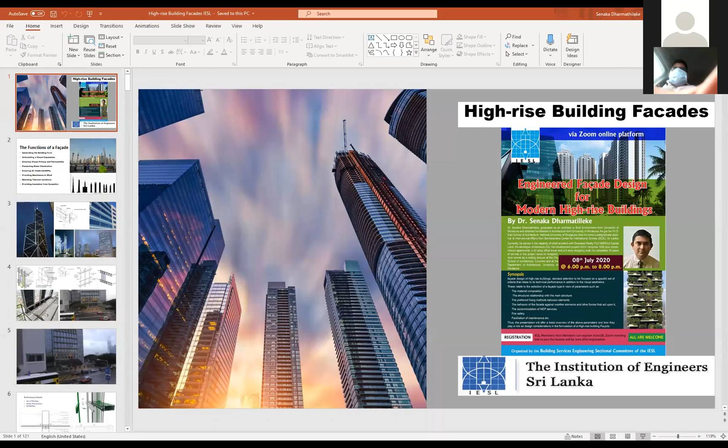Okay. So, talking about high-rise buildings and building facades, especially about building facades, I must say this is a very specialized field, and we do have facade engineers, glazing engineers who are related to this field. First, let me start with a confession. I am none of them. I am not a facade engineer nor a glazing engineer, and I wouldn't call myself an expert or a

specialist in this field. But what I am going to do today is share my experiences and also voice my opinions as well as views, and also share some of my fears and anxieties related to the development of this science of facade engineering, and maybe in my own humble way make a contribution to initiate this field of facade engineering, which should come from the engineering fraternity, right? So please bear with me.

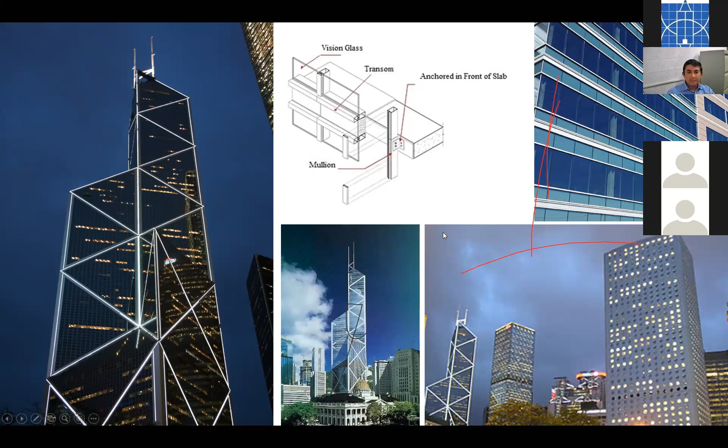And what I'm trying to explain by this slide is that when a professional, an architect or an engineer, is commissioned with the task of deciding on a facade, so many models or methods or strategies are looked at, explored, evaluated, discarded, then readapted and adjusted to suit situations, debated intensely in terms of the technical possibilities and also the architectural expression and so on. But at the end of the day, once the facade is done and dusted, it's all covered up and nobody talks about it anymore, right? So everything that went on to that

you see, does it come on this one? No.

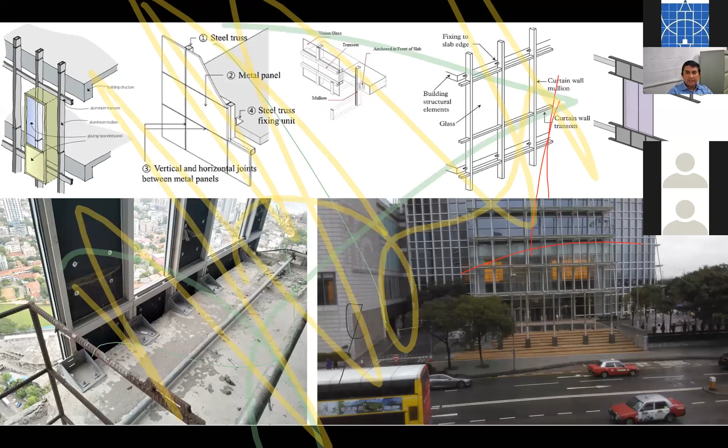Okay. So now this is the final product, the ground level of the IFC building in Hong Kong. And what are the performance characteristics that you want to ensure by a facade? Of course, the three main performance characteristics would be the infiltration of air, the penetration of water, and the deflection of the structural members of the facade, such as the mullions as well as the transoms, which are the main elements that check and balance the deflections that affect the facade.

Now you can see the transom, which is the horizontal member, and the mullion, which is the vertical member. Then you'll have the pressure plate, which ensures that the glazing infill is secured onto the transom and the mullion, and of course it is supported by an EPDM setting block, and the pressure plate and the glazing infill is at the interface with the weather.

It's taken up by an EPDM gasket, and all of it is at the end of the day covered by the pressure plate covers, right? And moving on to a more recent experience of checking these parameters such as air infiltration, water penetration, and deflection.

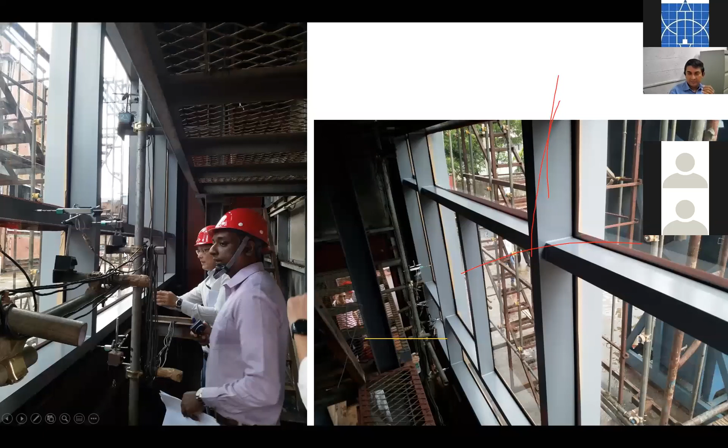Now here within the structure we have our engineer Mr. Jivananda, a member of the institute as well. I always feel very safe with him, because he is very thorough with his checking and ensuring that these deflections as well as penetrations remain within parameters, right?

And first, this is the preliminary inspection to see whether the gauges are in the correct locations and in the correct positions, and to see whether the joint fillings are perfectly done. And once this testing is done, he would move on to the control room.

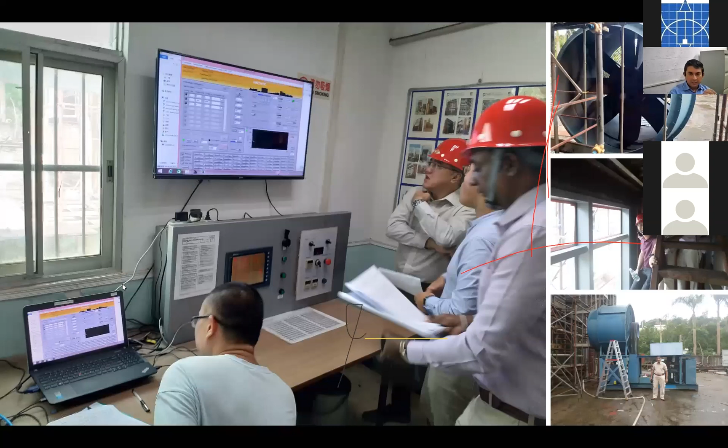Then, instead of using positive pressure of 4 kPa from outside, negative pressure of -4 kPa would be used, so the room would be made into a vacuum, and by making the chamber minus 4000 pascals, you will gauge the deflections of the mullions and the transoms, and also the amount of air infiltration.

So this is the control room, and the warning signals will come out if these parameters go beyond permissible values. And these are the apparatus at site. Still the turboprop is not engaged. This is an image just to show the scale of the chamber. The three of us can very comfortably fit across the chamber on the side of the width, and that's the size of the wind turbine.

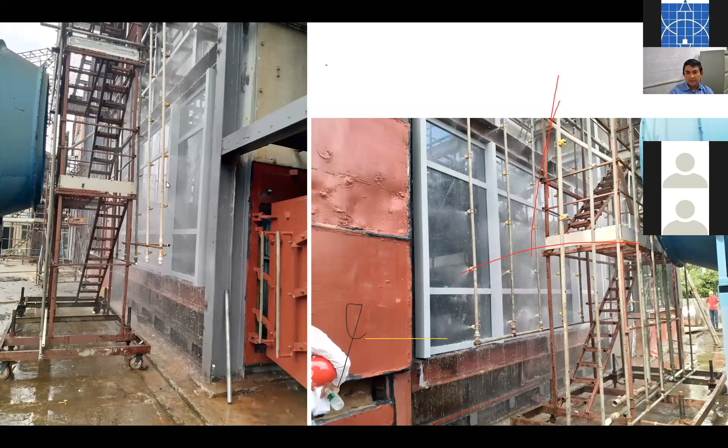Then there will be the nozzles at the designated spaces. The spray rack will come into play and start simulating rain conditions. First, it will be the static water penetration test with the negative pressure. Then the turboprop will start operating, and then you will see cyclonic conditions created.

So to check the functional validity of the EPDM gaskets, the beadings, the sealants, the backer rods, everything now has to come into an orchestrated play of preventing air and water infiltration through the building skin or the facade.

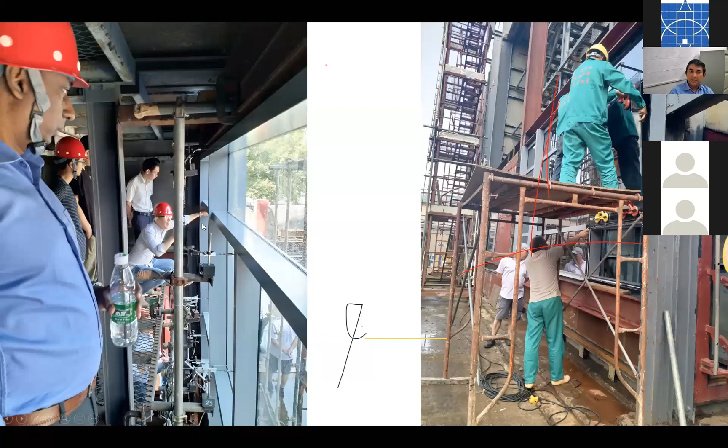At the end of the test, after going towards even 1.5 times the working pressure or the design pressure, 6,000 pascals, you will test whether any permanent deflections are observed in the members, such as the mullions and the transoms. Then Mr. Jivananda will come in again and check whether any water has penetrated by visual observation, and check the mullions and the transoms for any permanent deflections, whether they are within permissible values.

At the end of the day, we get these people to dismantle the entire fabrication piece by piece, just to ensure that no fraud has happened, where stiffness is increased by the insertion of steel rods or steel elements into the aluminum channel.

Now this is all about performance testing. What parameters are tested? We said infiltration, which is possible through the joints and gaskets between the horizontal and vertical mullions. We call them horizontal and vertical, but the horizontal members are called transoms, and the verticals are the mullions. Not only the gaskets and joints, but the weep holes and sealant joints could also allow air infiltration. So what we test here is the integrity of the composite assemblage, or composite assembly.

There are standards specifying the acceptable level of air infiltration, given in terms of cubic feet per minute per square foot at a given test pressure. I can vaguely remember the permissible amounts were about 0.06 CFM per square foot at a minimum pressure of 1.57 PSF. But I wouldn't rely on my memory and the validity of these at this time and age. I'm sure the glazing engineers would specify the exact level of air infiltration for a given assembly and so on.

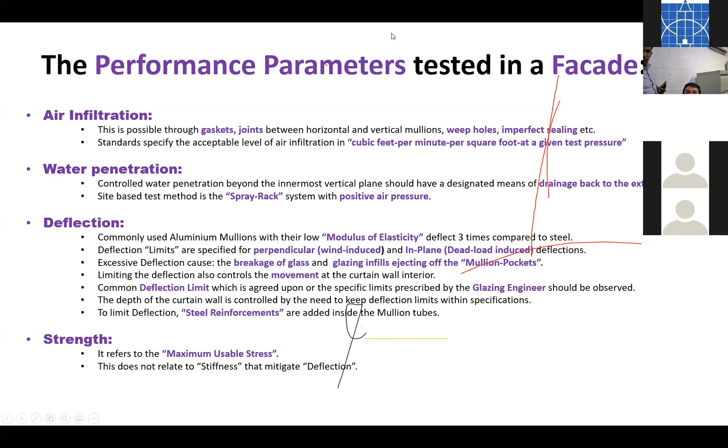Excuse me, I think the screen is accumulating some lines — there are some lines appearing on the screen. We will try to see how we could delete these lines. Bear with me for some time while Nara Mali will help me. Mikael. How did these lines come? Mikael. For a moment, we will stop sharing the screen and we'll be back in a moment. Hold on.

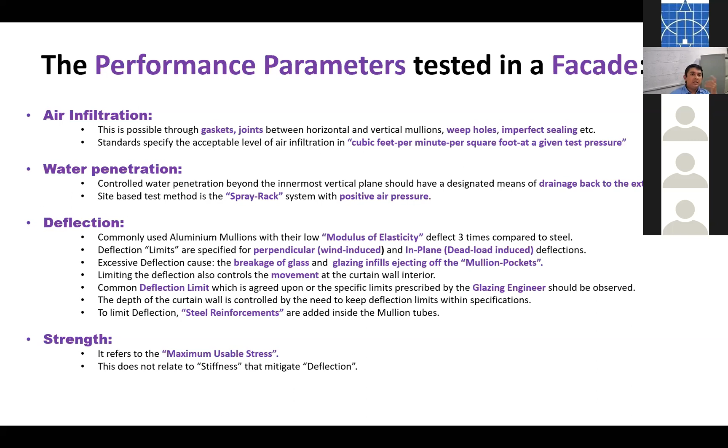Having looked at those characteristics or test parameters, let's look at the common facade types.

The common facade types now used, the most predominantly used ones, are windows and solid wall, which is seen on the right hand side of the screen in a building that overlooks the Victoria Harbour in Hong Kong Central, designed by Mr. James Kinoshita. And then you have the curtain walls.

The curtain walls also have two types, the stick system and the unitized system. Stick system and unitized system have differences in terms of installation and the assembly of components in sequence.

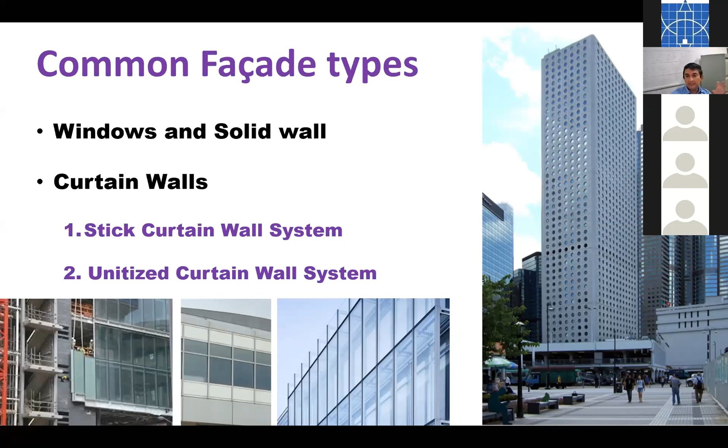Now, looking at windows and what you call the solid wall, here again I look at the Jardine House building designed by Mr. Kinoshita, one of the most senior architects at Hong Kong Uni, he would explain how these punch windows, which look like portholes.

We thought it was because the building was looking towards the Victoria Harbour, and he wanted to make a gesture related to navigation. No, but the engineers and the architects got together and decided that circular punch holes would ensure minimum damage to the structural integrity of these shear walls. So that's how the circular windows came in.

Next to this building stands another building which gives a very provocative expression, the Bank of China building by Mr. I.M. Pei. Many people would assume that it's a bundled frame tube structure, but actually it's the same frame tube structure which is folded inward and outward, and you can call it an external frame tube structure.

In terms of the principle, the glazing infills are mere infills between the structural frame of the facade, or the external frame of the tube. So it could also be categorized along with the window and solid wall structure.

The next one is the curtain wall. The curtain wall is defined in terms of its structural relationship with the main concrete structure, whereas the solid wall and windows, the glazing infill will stand solidly or squarely on the perimeter slab edge, perpendicular to it. Here we would find that the curtain wall is held as an external element and attached externally to the perimeter slab edge on the external vertical surface.

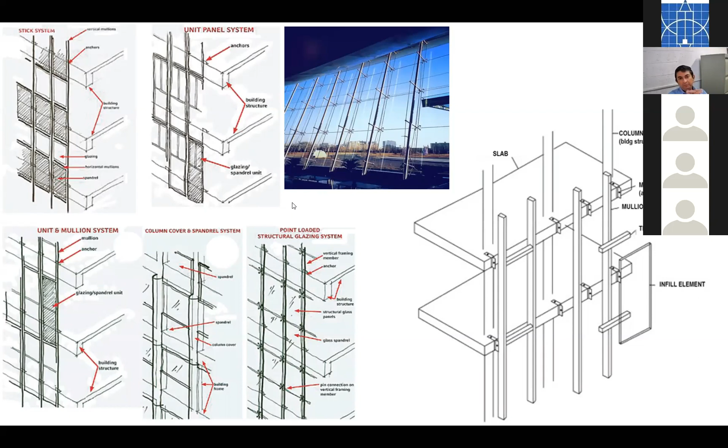The glazing sits squarely on the horizontal surface of the receiving slab. So the curtain wall systems, as I emphasized earlier, the stick system is where the components are assembled piece by piece at the building site.

First the mullions come in, then the transoms come in, and then the glazing infills are installed. So it's actually the mullions that take the main load, and the transoms are secondary elements on the mullions, and then comes the glazing infill. The anchors would take the entire load of the mullions, the transoms, as well as the glazing.

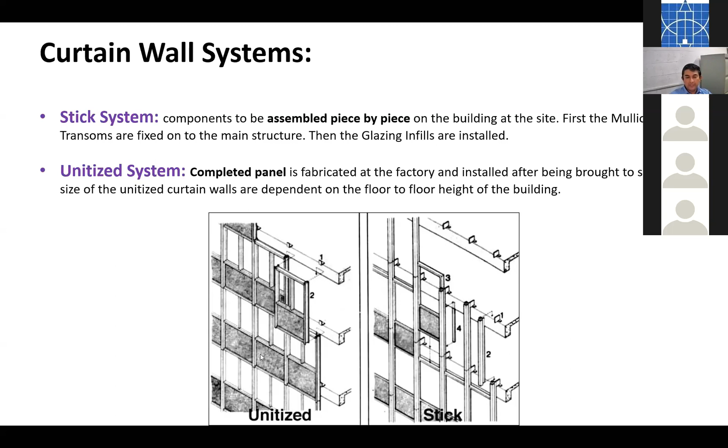The unitized system comprises completed panels which are fabricated elsewhere, brought into site from a factory, and installed after it comes to site. So the size of the curtain wall will depend on the floor-to-floor height of the building, or where the anchors could be located. It's almost like hanging a picture frame on a wall, of course in a bit more complex system of fixing.

You can see again the unitized panel here on the left hand side, where the panels are fixed directly onto, or hung directly on, the anchors, which are fixed onto the floor slab of the concrete structure. On the right hand side is the stick system: you first fix the mullions, then comes the transom, and then comes the glazing infills.

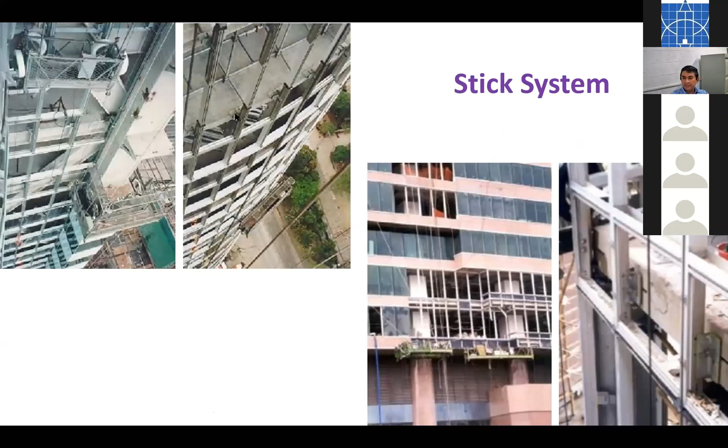Now these are two images of the stick system. First, the skeleton is made - you can see the mullions fixed by the anchors. Then comes the transoms, and then slowly but steadily the glazing infills come. You can see a detailed image of the anchor there, which secures the mullion firmly onto the perimeter slab edge.

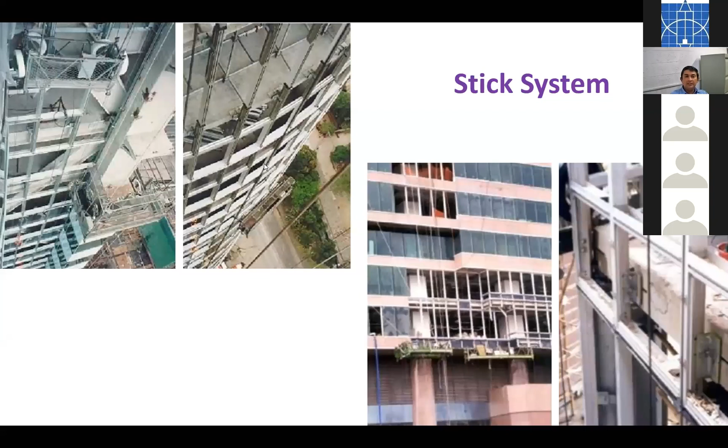And then, of course, the good old unitized system where the entire unit is brought in like a picture frame and literally attached or hung on the slab edge, on the anchors which are mounted on the perimeter slab edge. So it could be on the horizontal surface of the perimeter slab edge, which gives you better assurance that it won't be dislodged, and the stresses are much more easily distributed onto the concrete structure.

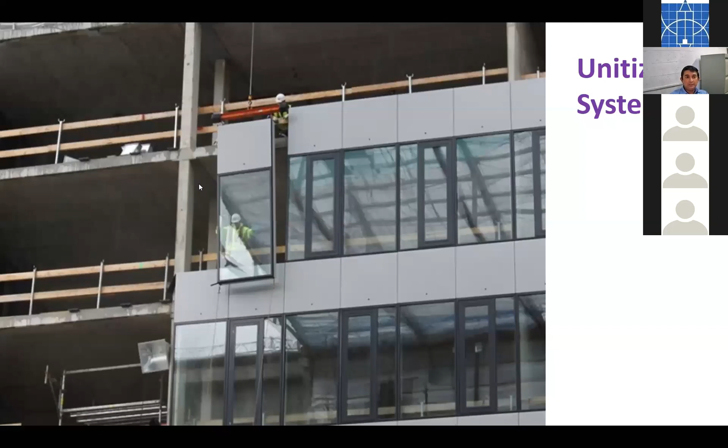Talking about curtain walls, I will dedicate more time to the curtain wall, since this is something novel that is coming along with most of our high rises now. Being a curtain wall is not that easy, because just like human relationships, it's the relationship with the main structure - a very complex tango the curtain wall has to have along with the main structure. Why? Both of them have to move together, and each of them move in different ways. It's almost like human relationships, right?

Coming into the finite details of the curtain wall and the main structure relationship - if you look at a curtain wall, you see the joint there, the anchor. The horizontal loads are transmitted through the connectors at maybe the floor as well as the column. But the vertical loads, or the dead loads, of the curtain wall will be directly from the anchor, which is on the perimeter floor slab.

So what are the movements that the curtain wall has to make along with the main structure? First, the wind induced sway - the main structure sways according to wind, because the slenderness ratios are high in high rises. So with the wind, the taller you are, the more you sway, and the curtain wall also has to move along with the main structure and resist the sway. So it has to be flexible.

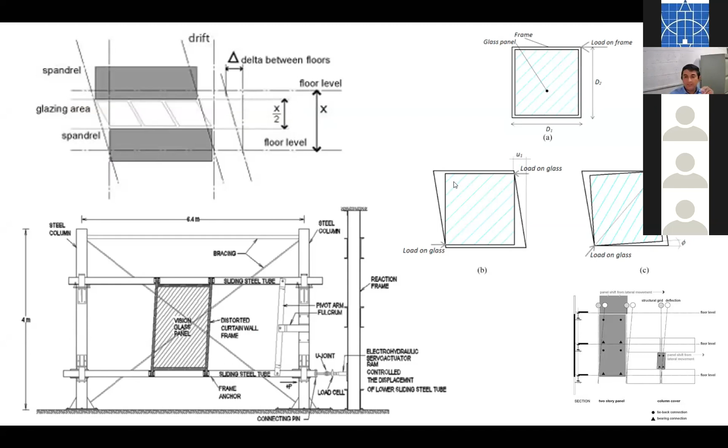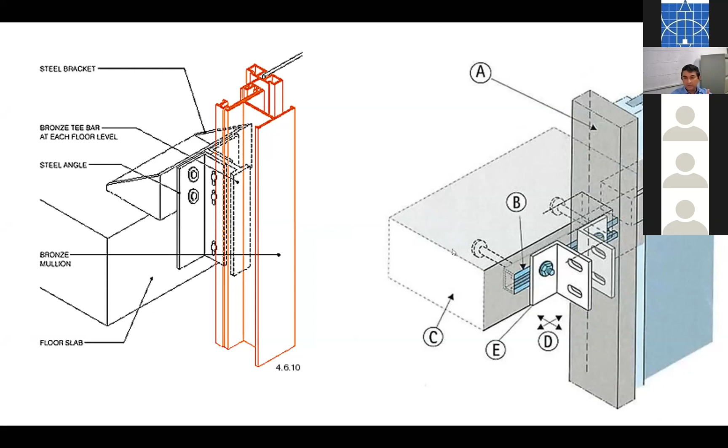Now, in order to take into account all these, the joints have to ensure, just like the vertical movements of the thermal expansions could be accommodated by slotted anchors. The anchor would allow up and down movement. Then the sway from side to side will be allowed from embedded parts, which allow for sway sideways, and then the slotted anchors on the perpendicular would allow back and forth movement. So you can see how the curtain wall could move on all three axes, up and down, side to side, back and forth.

Now, we talked about the requirement of fireproofing, or the problem of the curtain wall in ensuring the role of a fire stop. This is the floor slab, and this is the curtain wall, and this is what you call the perimeter slab edge. Now, the perimeter slab edge always has to be a building joint. Why? This is the gap between two fire compartments, the floor above and the floor below, right? So you are not supposed to allow fire. So these fire stops need to ensure fire compartmentalization, to ensure that the flames and smoke do not migrate up to the upper levels

between this perimeter slab edge joint. So the commonly used material for this is rock wool, by ensuring 25% compression. So commonly what they do is they get a 125 millimeter thick rock wool segment and ensure it is squeezed into a cavity of 100 millimeters. Although it's not mathematically exactly accurate, that works, and people are quite happy with it. And of course, the rock wool is good to prevent flame migration, but not smoke. Smoke can traverse through the rock wool, although it's compressed.

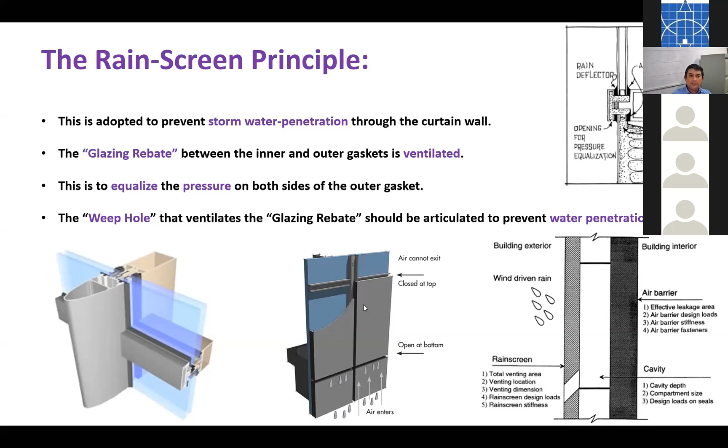I think this is the more theoretical diagram, which shows the pressure equalization by the weep hole, but this is the more practical diagram which will show the outermost gasket, which of course becomes an EPDM gasket in reality. And in order to equalize the pressure on the outermost gasket on either side, this weep hole will allow air to come in and fill this pressure chamber, so that the pressure at this point and this point are the same, and the water penetration is checked.

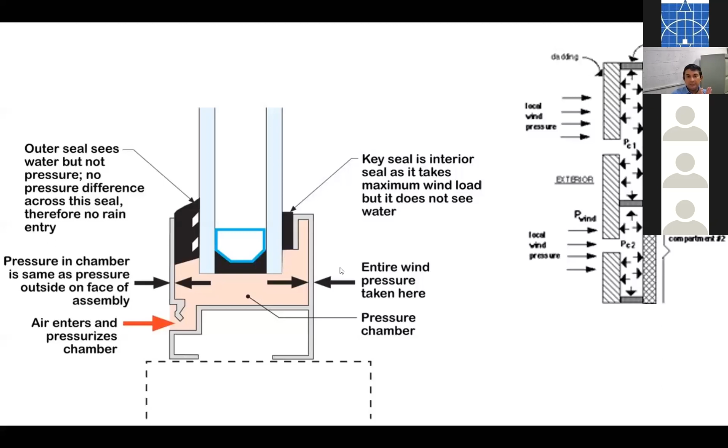So it's the inner gasket that takes the air pressure and prevents the air from penetrating into the building. So this is the rain screen principle described as simply as possible. But of course, there are much more complex methods of looking at it and articulating a frame. Now, just to show you what these weep holes are. These are the weep holes which are exposed. Of course, in reality, we have weep hole covers. Individual neoprene covers will cover these, so that the beating rain coming in horizontally will not be allowed into the pressure chamber.

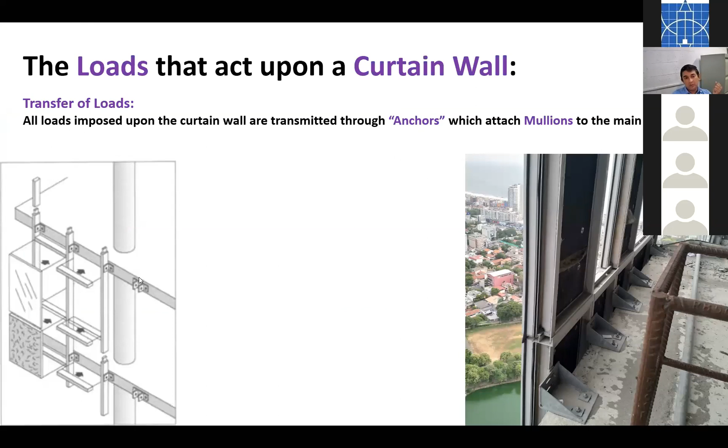Now, let's talk about loads that act upon a curtain wall. The transfer of loads happens at this point. So all the imposed loads of the curtain wall, whether horizontal or vertical, are transmitted through anchors such as these, which are attached to the mullions, right? So the mullions transmit all these to the main structure through the anchor here. And one of the main loads will be the dead loads. The dead load is the weight of the curtain wall itself, the mullions, the transoms, the sunshades, etc. And not to mention the glazing infills, which come with a substantial weight, which has to be carried by the main structure.

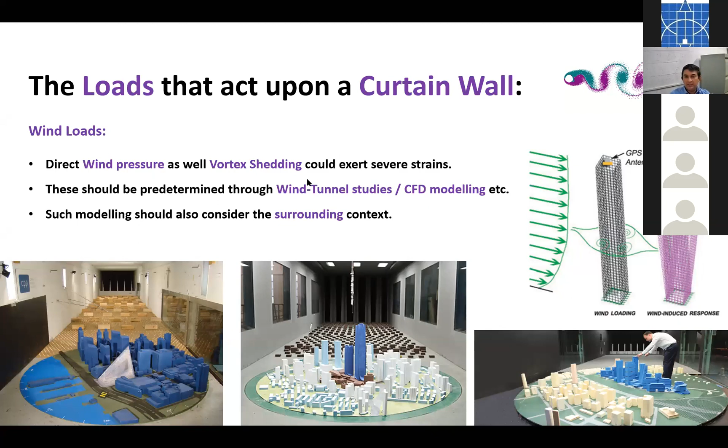So these are examples of 3D modeling, looking at how the model would change its shape along with the crosswind, along the wind, or how torsion takes place, and how the structure twists and turns against the curtain wall, and how these relative movements have to be resisted.

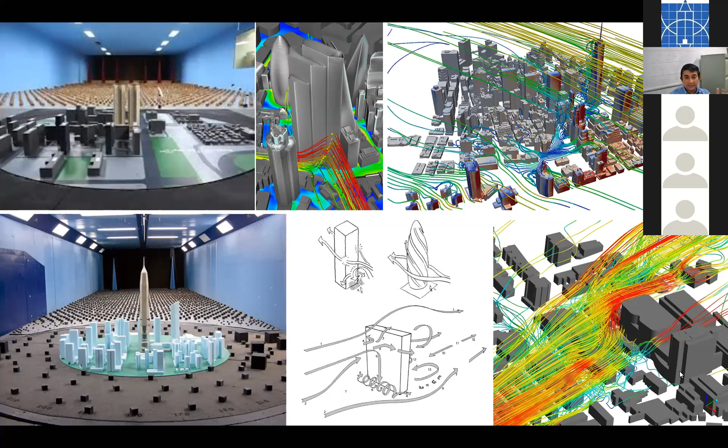Then the other one is about the seismic loads. We talked about it, and the wind-induced building sway. So this has to withstand the sway by the gap between the building infill and the mullion we talked about, right? And how do we allow for this relative movement? Of course, these are merely thumb rules. You need to take it with a pinch of salt, because there was a time when we were looking at 75 millimeters as the comparative gap that could allow this relative movement between the curtain wall and the main structure to allow sway.

But of course, you need to consult the glazing engineer to come up with the proper limits prescribed for that particular application of the wall, because there could be different needs depending on different usages of the buildings and also the client requirements. And you can see how the anchors are designed to ensure movement sideways, back and forth, and of course there will be top and bottom movement allowed in terms of the mullion joint. These are just images I took from a work site of a friend of mine.

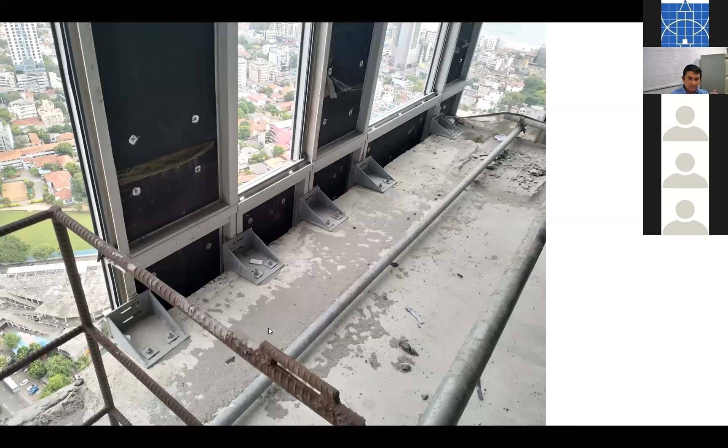And then we come to the thermal loads. In terms of the thermal load, as much as the modulus of elasticity, aluminum has a relatively high coefficient of thermal expansion. So it expands and contracts within the span of a few floors. So in order to accommodate these expansions and contractions, the transoms are cut a bit short where they meet the mullion, just to ensure there's a slight gap between the vertical mullion and the horizontal transom.

So vertically, the anchors would carry only the wind loads, and will be slotted to allow movement, like what you see here. The anchor is slotted so that the vertical movement up and down of this mullion is allowed, right? And this also allows the live load deflections of the perimeter slab edge and the creep, right? So not only the thermal expansions and contractions of the mullion, but little deflections of the floor slab also could

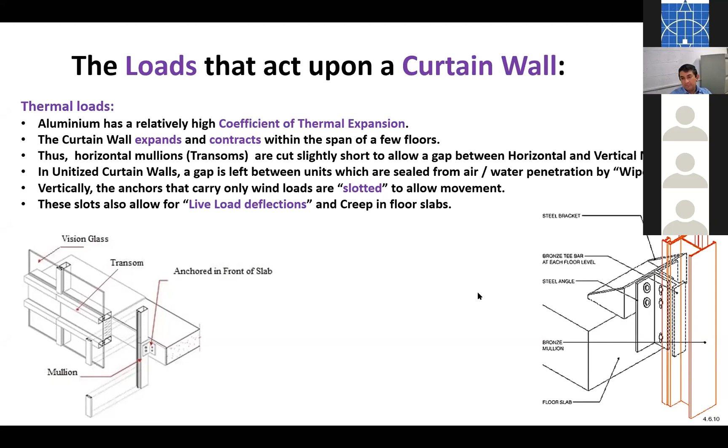be absorbed by that. And another mechanism is, now you see the anchor there. Now the other flexibility you could get is the telescopic joints between the mullions, right? So you can see the joint is done one into the other, so the joint is telescopic. It allows a little bit of vertical movement relatively between two mullion sections.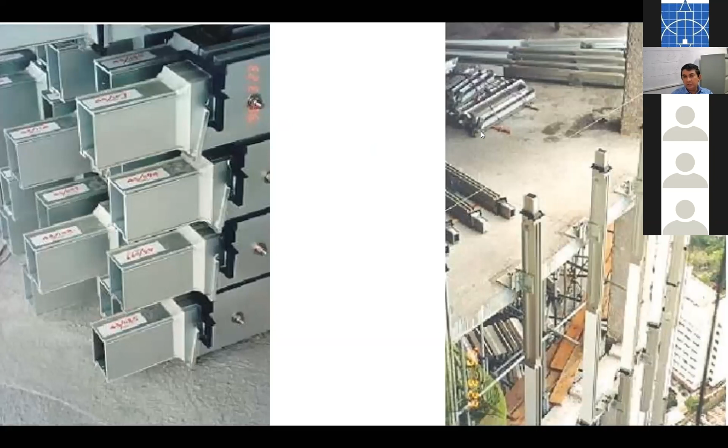Talking about the loads that act upon a curtain wall, this is something that we hardly experience, the snow loads. Of course, you need to be careful if your curtain wall slope exceeds 20 degrees, right? So just like a roof, if your curtain wall, especially this happens in the penthouses, or the uppermost lounges in high rises where you have palisaded roof coming down at angles which are less than 20 degrees, then you need to ensure this snow load is also taken into account.

Then of course blast loads that we also have been concerned with, and especially in Singapore, the SPE was conducting certain tests alongside the FBI on how to ensure blast resistant glass. Now, of course, bulletproof glass is laminated glass, we know, but we need to ensure that the entire laminated glass panel does not get segmented or detached from the frame and then hit an innocent inhabitant and kill the guy off.

Now, in order to do that, experts have developed ways and means of ensuring that the glazing infill doesn't detach from the frame, maybe the mullion and the transom frame, or if there's a different frame that holds on the glass, that frame also has to be secured; even if it flies off with the frame, that could also be fatal. So you need to make sure that from the point you attach it to the main structure, the frame, the glazing infill, the gaskets, everything stays compact as one cohesive structure.

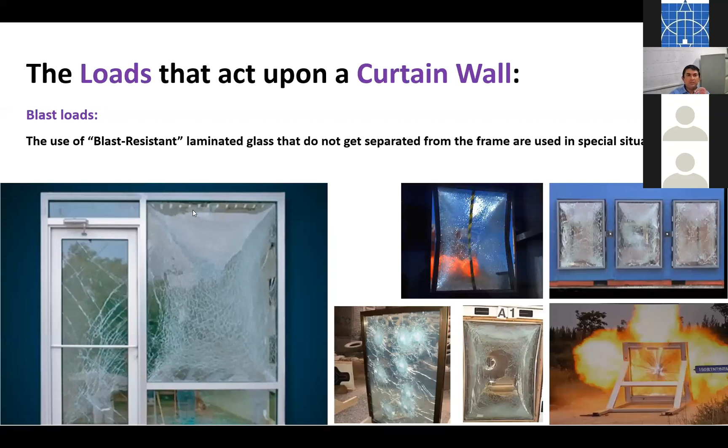Now, talking about the blast loads, of course, we need to talk about the infills, right? So coming into the infills of the curtain wall, these panels which are inserted into the wall in between the mullion and the transom, the most popular one is glass, right? That's why we always call it glazing, although sometimes the infills are of different material.

Now, the glass types start from annealed glass or float glass, which is the glass which is melted and smelted on a bed of molten tin. So that's why you call it float glass, because the glass is floated in the process of annealing on a molten bed of tin. And the next step is heat strengthened glass. By doing the secondary heating process, this is strengthened, but the strength is about twice or thrice at the most than the annealed glass.

But the better type of safety glass will be the fully tempered glass, which goes through a secondary process of annealing, which melts the glass and systematically quenches it, so that a little membrane or a crust forms around the glass content while the interior is molten, and of course it creates certain stresses within this substance, but it is about 6 times stronger than the annealed glass.

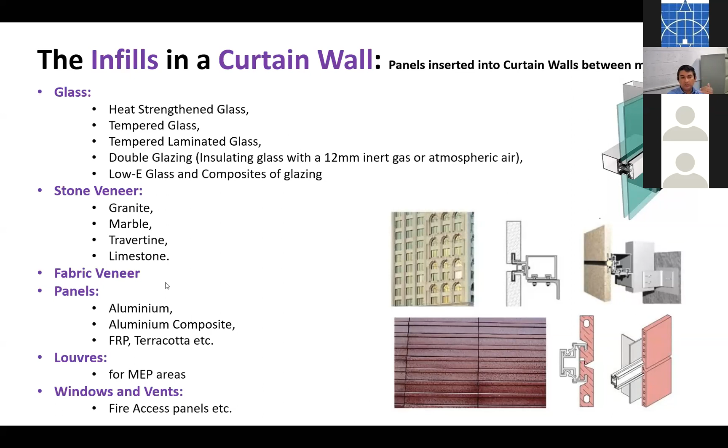Of course, for the MEP areas where you need air infiltration, you need to have louvres. Then windows and vents are also there, especially for fire access, and mostly recommended only for fire access panels when it comes to high rises. Why? Because these fireman knockout glazing panels are needed when you can't enter from the ground floor, right? So you could use them for venting the toxic gases, toxic emissions from a fire, or let emergency access into the interior.

So these fireman knockout panels should ideally be fully tempered glass, so that they would allow complete fracturing of the glass panels into small and safe pieces. Or else there are conditions, I think now in Singapore they are recommending pivoted window panels for fire access panels.

Of course, having talked about the pivoted windows as fire access panels, dedicated fire access only, the main problem you have to encounter is water infiltration, because it is very hard to prevent water infiltration in a pivoted window, because the gaskets and the beadings especially have to be very, very carefully articulated. Otherwise, you can allow the fireman to come in, but along with the fireman would also come water when it's facing cyclonic conditions outside, right?

Talking about glass, there's another trade-off we have to talk about: safety and sustainability. Now, sustainability is the double glazing or the DGU units we talked about.

Two panes of glass with a spacer, ideally a 12 millimeter gap inside, filled with atmospheric air or inert gas, is the ideal, along with desiccants to absorb moisture. This ensures good sound insulation as well as heat insulation, because heat waves have to pass through two contrasting medias, resulting in huge heat loss, so very little heat comes into the building.

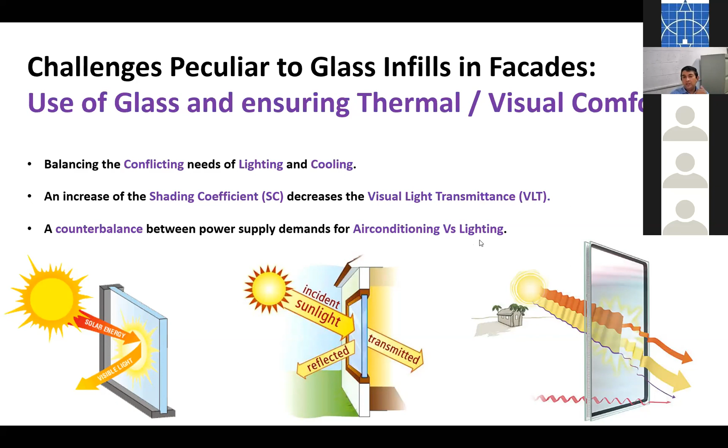Now we talk about infill types in curtain walls. We are talking about glazing, but glazing needs to be controlled in terms of visual penetration - we talked about privacy and the need to expose certain areas when needed. For that purpose, we have two types of glass in curtain wall glazing: one is vision glass, and the other we call spandrel glass. Vision glass is used where you need to see outwards and want to be seen from outside - some of us want to be seen as well as seeing the other person on the other side.

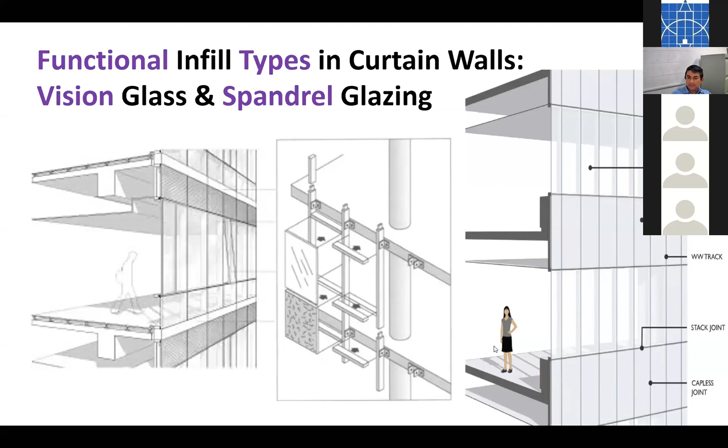Now these are examples of spandrel glazing. That's the spandrel and the vision glass, and you can see the ceiling cavity which should be contained there.

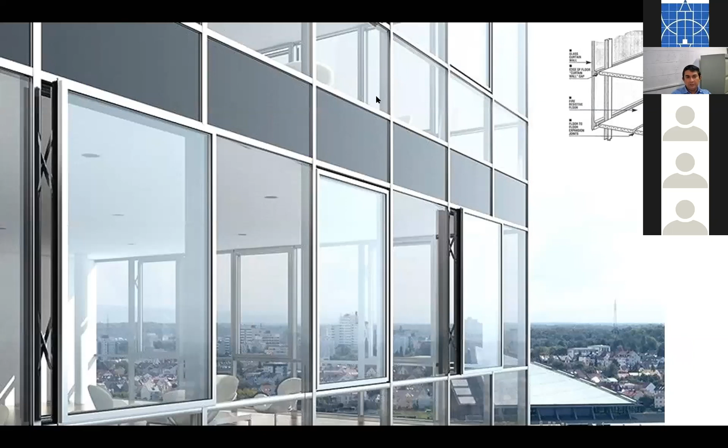Another example of spandrel glazing, incorporating rigid insulation or rigid fire insulation in the spandrel area to provide higher thermal resistance. This is a preferable arrangement in my book, because it allows the uppermost areas of the mullions to be insulated against the spread of flames and their exposure to flame, because flames could make the mullions weak at this point and compromise the whole integrity.

Then you can see how the introduction of rigid insulation ensures what you call a shadow box in this glazing, making it opaque. So you wouldn't see any of the compressed rock wool or the fire stop sealants that help ensure fire compartmentalization. This is that setup, and you can see another configuration here ensuring the upper part of the perimeter slab edge receives the majority of the rigid insulation.

In this instance, this is the more preferred method for me, where you use, if not both surfaces, at least the lower segment immediately below the perimeter slab edge, with the rigid fire insulation, because this is the more critical part for the mullion's integrity. This is the rock wool insulation, compressed rock wool, and the fire stop sealant that has to go even above the anchor joints.

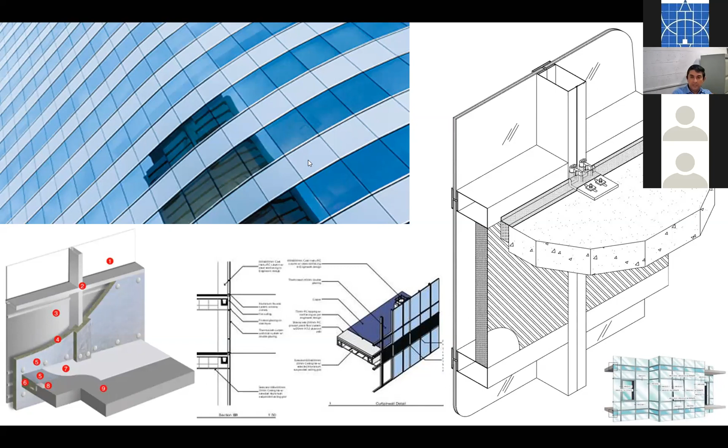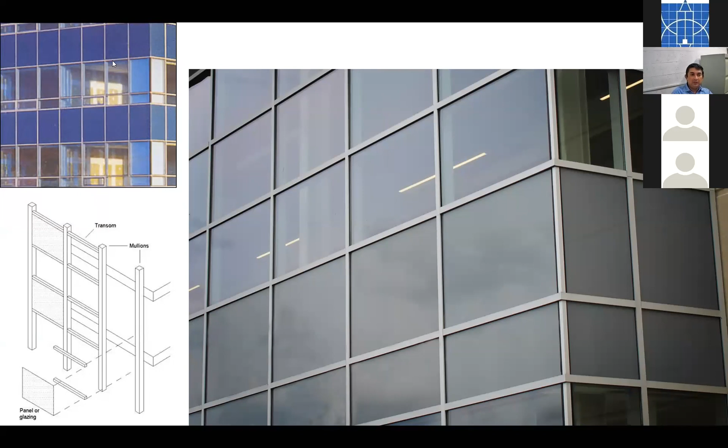So this is what you see from outside, and these are more visual examples of how the spandrel glass and the vision glass would behave on the building facade. Here you can see up to the sill level, the spandrel glass is extended, and the ceiling cavity below is also hidden from view by the spandrel glazing, and ideally the perimeter slab edge should come somewhere around here. So although these are visually expressed as different lines, these are not done for aesthetics alone, but of course you can make this part of the aesthetics.

So talking about aluminium and the curtain wall, I think this is something I would like to stop and discuss, because the usage of aluminium in our building industry is quite high, and aluminium is used for good reason. One is the low unit weight and the qualities of good weathering. It can withstand tropical weather, and the color fastness is good in terms of withstanding rusting, corrosion, everything. Aluminium plays a very superior role against other metals.

The relationship with aluminium in curtain walling is rather a love and hate relationship. It's like a human relationship where certain people have good qualities, magnificent skills, which make them really needed in our day-to-day activities. But there are also bad qualities which make it difficult to deal with them. Still, since we have benefits from the association, we tend to tolerate the bad qualities and accommodate their shortcomings in order to ensure those benefits are accrued for our usage.

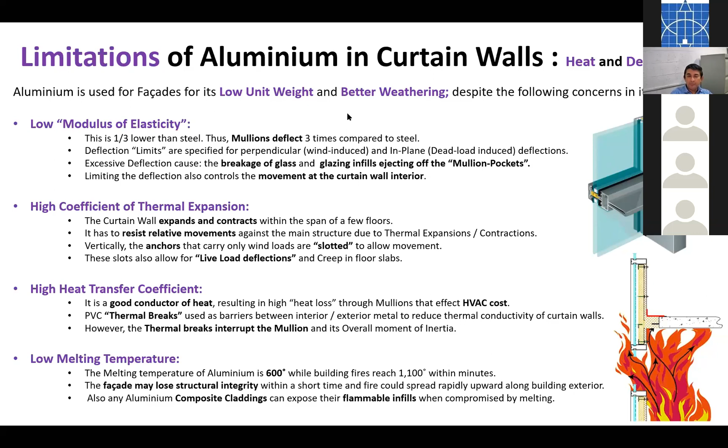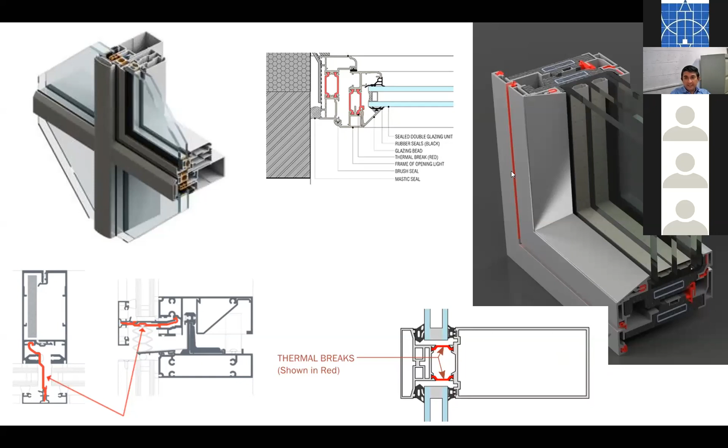And I think this is even a better image, which shows the mullion inside, the pressure plate outside, the pressure plate cap, and these are the EPDM gaskets outside, and of course inside you'll have the backer rods and the sealants coming in, and you can again see how the overall I value is compromised by introducing this thermal break.

But of course, these are things that we'll have to look at. The compromises have to be made. You need to make value judgments as to what qualities you expect from your curtain wall in terms of its structure as well as the heat conductivity.

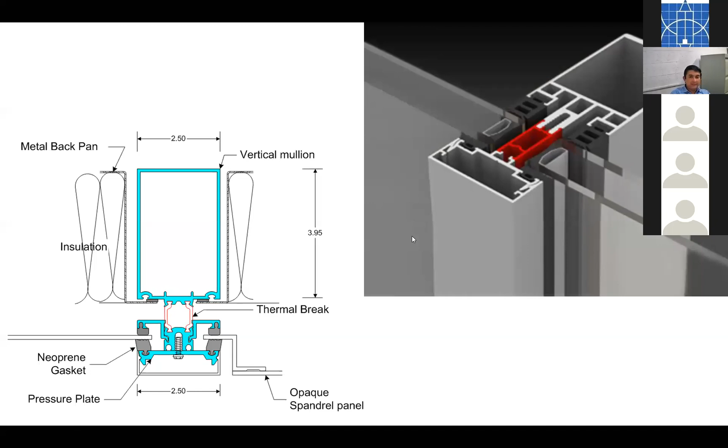Well, we talked about the perimeter slab edge, how it needs to be a fire stop. We talked about how the space between the back pan of the curtain wall and the slab has to be sealed off against the migration of flames and toxic fumes, right? And it has to have non-combustible insulation at the interior face of the curtain wall.

We talked about how mullions need to be wrapped with heat insulation or with fire mortar near the ceiling joint to prevent the mullion from melting and spreading the fire to the floors above, right? And if that happens, what's the issue? Then the strength of the mullion is compromised, the glass infills will break, glass will shatter and fall onto the street. It will harm the pedestrians, the firefighters, the fire hoses, the fire engines, everything.

And then it will leap up the building like this and cause fires on each floor, compromising the principle of fire compartmentalization. According to regulations, you have to compartmentalize the spread of fire and smoke from the engaged compartment to the compartments beyond, and ensure the fire rating of the floor slab. The fire stop is an extension of the fire resistance of the floor slab.

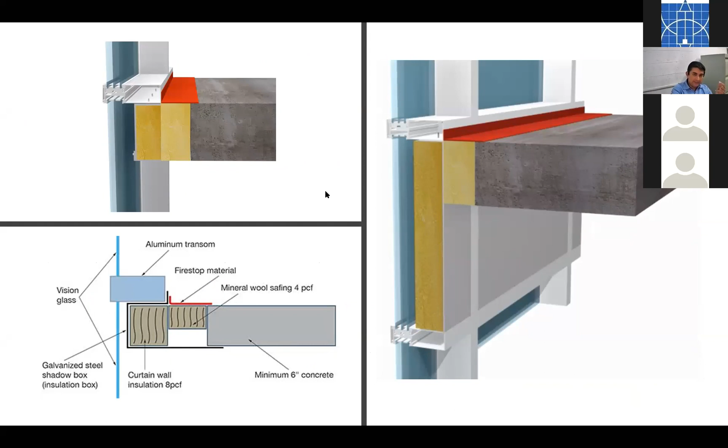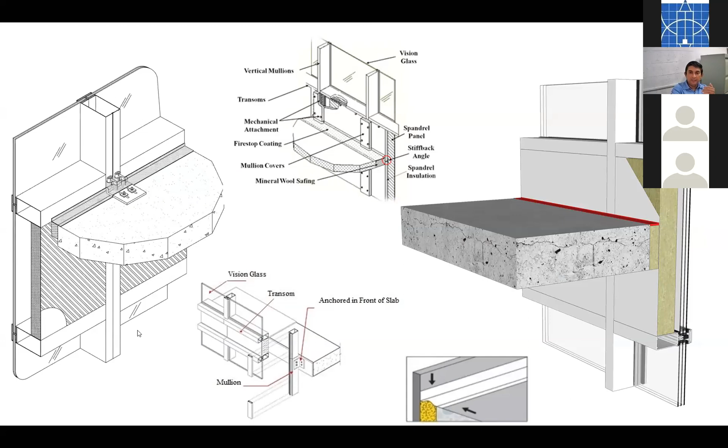And another two examples where the rigid insulation goes above and below the perimeter slab edge, which is even more preferred, so that both sides are equally protected. And these are a few examples with photographs. This is a mock-up model to show how the rigid fire insulation as well as the compressed rock wool is installed and the fire sealant comes in. But the final application of the fire sealant, marked in red, is needed to ensure that the smoke migration is stopped, right? And these are a few more examples. I'll rush through these slides.

And a few more examples to show the application of the fire stop sealant above the compressed rock wool. Then last but not least, we come to the maintenance and repair. Why do we have to do maintenance and repairs?

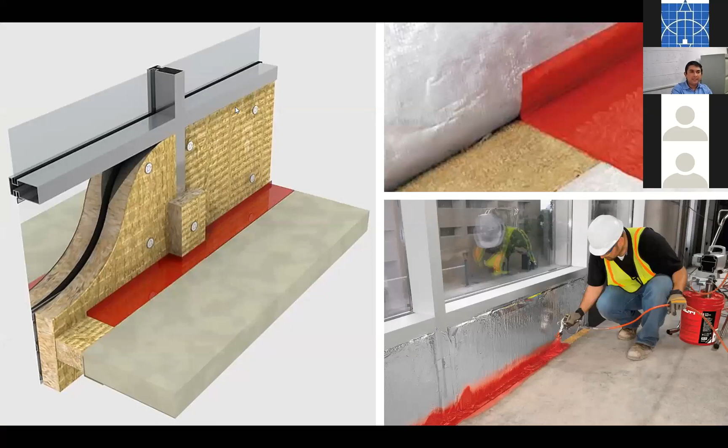Because the perimeter sealants form the first line of defense. There could be several lines of defense. So it is said that a chain is only as strong as its weakest link. Although the glass remains intact, and the mullions and the transoms would remain intact, if the sealants and the gaskets give way, then you have a problem. Then you expose the weather sealants inside along with the backer rods which are within the mullion frames.

Now, the typical service life of the external perimeter sealant will be between 10 to 15 years. And these need replacement and inspection, going to site, looking and feeling the joints. And sometimes this replacement needs meticulous surface preparation. Now, even cleaning has to happen on a very safe and stable platform, so that we don't arbitrarily use cleaning agents which de-anodize the anodized sections, right?

So you have superior applications like fluoropolymers and fluorocarbons and so on, which are baked-on coatings. But certain things like re-anodizing cannot be done in place, but they have to be protected by coatings, right? And to ensure that glazing seals and gaskets are intact, they need continuous meticulous inspection and maintenance. This is to minimize the water penetration.

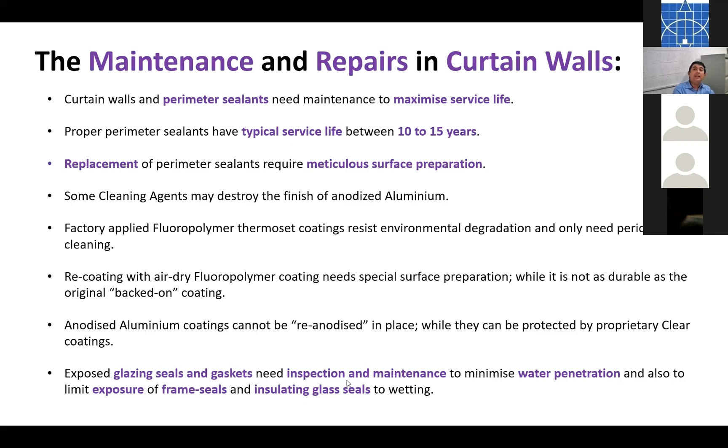If water gets into the second line of defense, it would expose the frame seals. And then the insulated glass seals could get wetted. And if the glazing gets exposed, especially the laminated glass, if it's PVB, then over time the laminated glass starts to get delaminated.

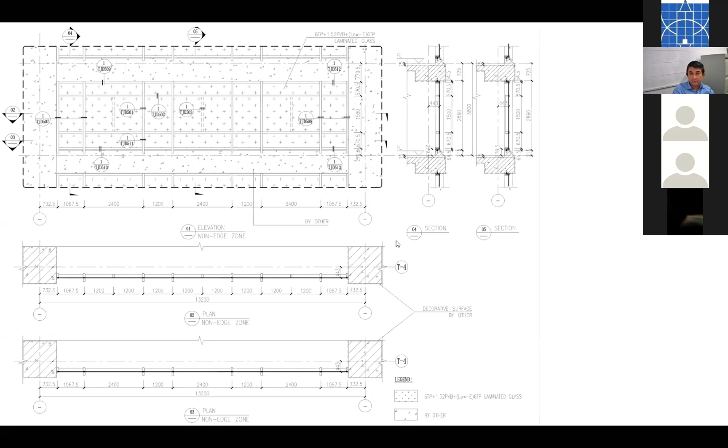Now, this is an internal joint. Here you can afford to have the silicone gaskets as well as the silicone-based structural sealant. But when it comes to the external frame, you cannot use that. Between these, you will have the transom, the mullion, and the EPDM setting block, which would receive the pressure plate, and the EPDM gaskets that go in. But something that you don't see here would be the EPDM setting blocks, the backer rods, and the weather sealants there.

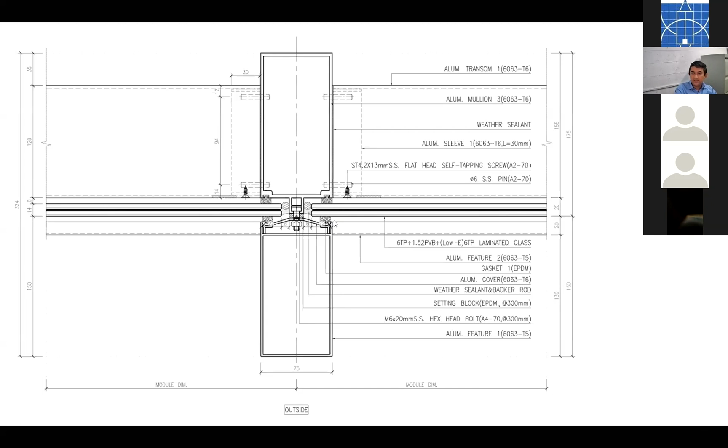Now, if water penetrates here, then the weather sealant and the backer rod are exposed. Then what happens to the laminated glass? From here it starts to get delaminated. So you need to ensure the outer line of defense is always protected. To do that, we need to ensure workers can stand on very safe, easy platforms to work with, like what we do here. So you need to ensure worker safety at maintenance.

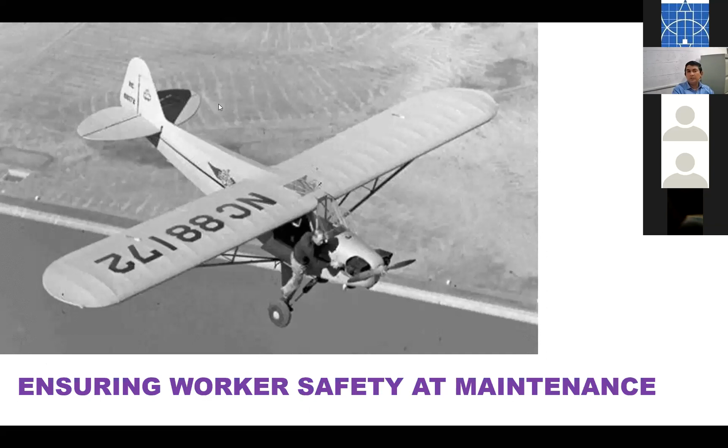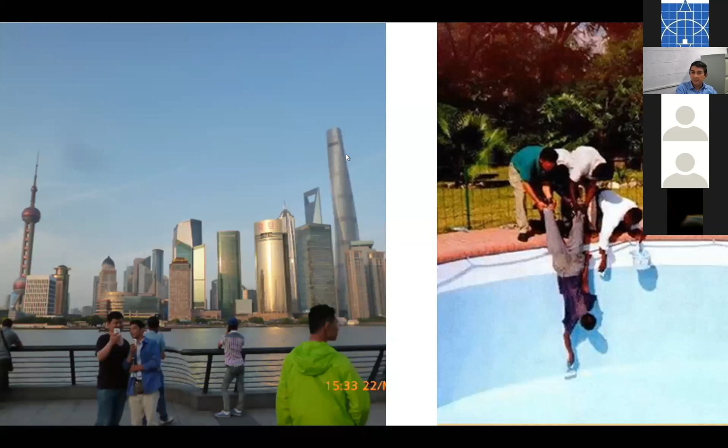But of course, it's not the same in every place. I see so many AC outdoor units being installed in other buildings. Suppose this is the only way that the maintenance could be done, by hanging out the guy who's doing the maintenance as well, right? Now, if we have buildings such as these, if you are not careful about the maintenance worker, we might as well adopt strategies such as this to ensure the building cleaning and the inspection of glazing sealants.

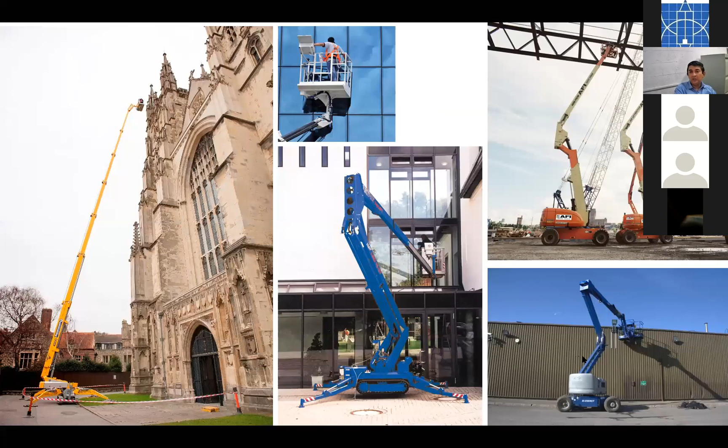For that, we now have snorkels. This is called the octopus extendable snorkel, or mobile snorkels, which are also called cherry pickers. Of course, we don't pick cherries here with these, right? These are mobile platforms. Of course, we do have scissor platforms, temporary gondolas, movable gondola systems, right? As well as the good old davit arms.

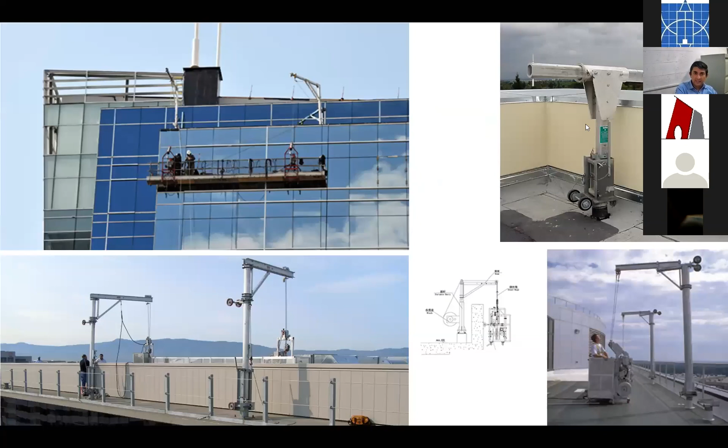Now, here you have the davit arm, which is demountable, and of course you can adapt the required size and form of the service gondola, right? And these are the newer versions of davit arms which are coming, so that it's operable from the service gondola itself.

And now the gondolas come in different forms and shapes. The movable BMUs, what you call the building maintenance units, which could run on rails like these, or which could run along the parapet wall like that, or which are static like these ones. The arms, the boom itself could be swiveled maybe by hydraulics or maybe mechanically, right? And here you have the heavier ones.

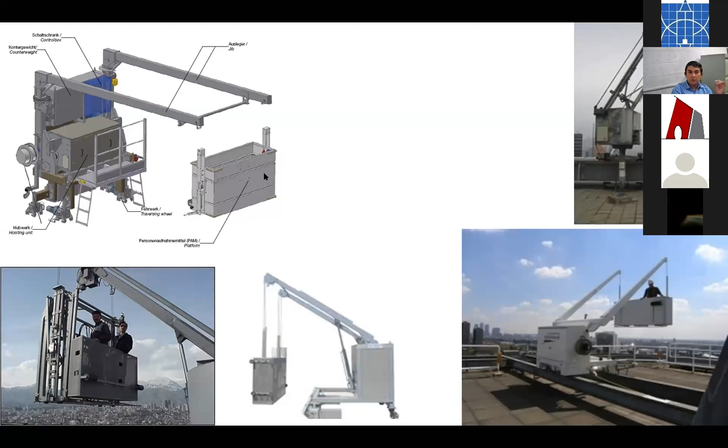Of course, you need to ensure if it's a rail, these floor mounted rails, the ones near the perimeter would always experience compressive stress, whereas the rails on the interior, when the boom arm is extended outwards, it will be a tensile stress because this rail will be pulled out of the slab. So you have to have two sets of wheels. One is to have mobility along when it's going under gravity, and then another set of wheels that will ensure that while it is mobile, you can resist the pull or the tensile force from the boom which is extended out there. So it is a job for the structural engineers.

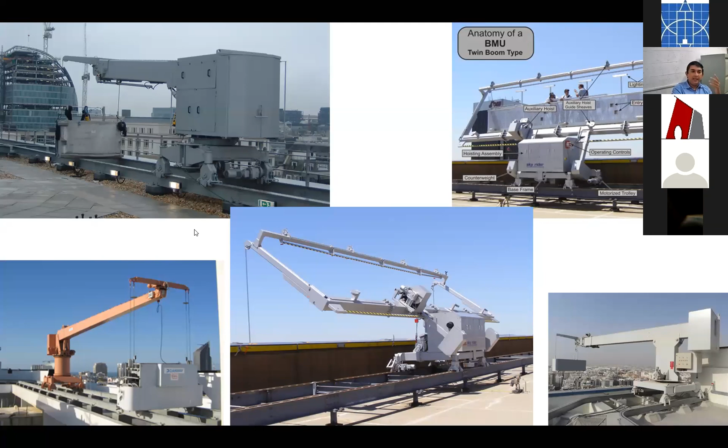Of course, if you're designing a high rise, you need to ensure that the BMUs or the building maintenance units are also designed along with the structure and added on to the building budget, so that there won't be last minute cuts. And of course, for different buildings, we do have different boom arms. The swivel booms with the swivel attachments also come with them.

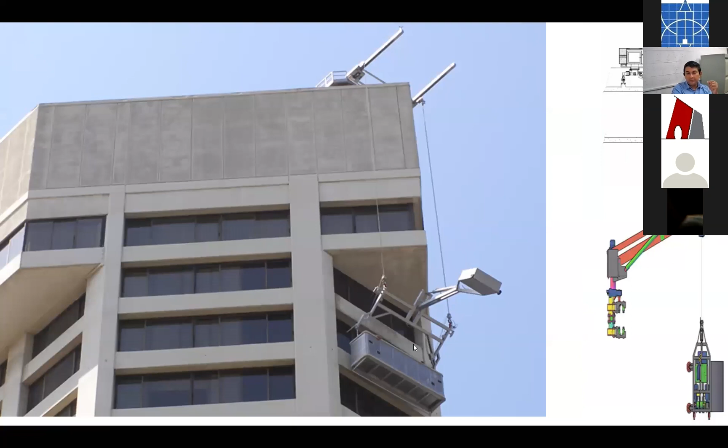So depending on the type of building, you may use again a parapet wall mounted BMU. Here on the top rail will be a compressive stress, and here will be a tensile stress. So structurally, we have to design accordingly. On this one, when the building does a little funny undulation, you need to have the gondolas with a counterweight, so the gondola itself could move into the building with the undulation, and the workmen can do their work without any problem.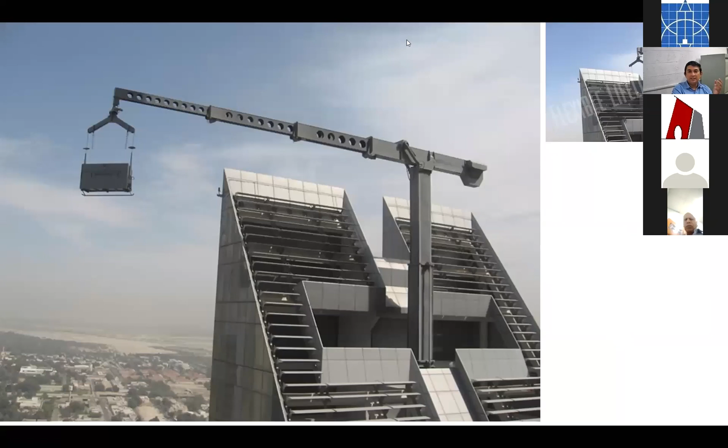Well, when the booms are not there, we do have what you call the monorail. So on this rail, which is permanent, the gondola will be a self-winding gondola which will move along. It will have its own motor to take it horizontally and vertically, wind up and down. And the only thing is you need to have a place for this to hibernate, right?

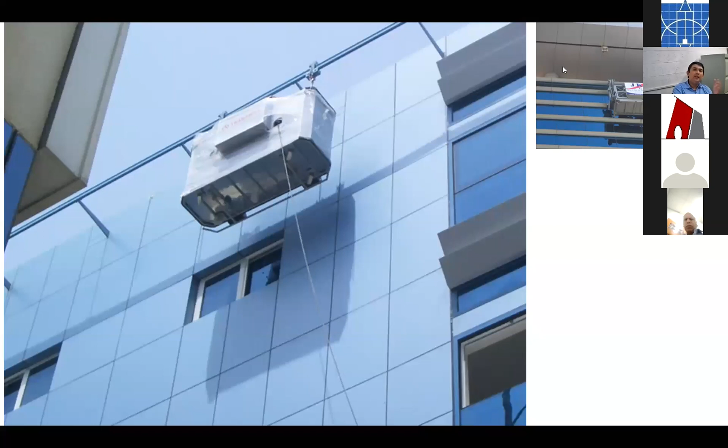And now this is again a monorail. You can see when the building top is undulating, when we have a little funny shape on the top, rather than having the conventional davit arms or the BMUs, it is much easier to have a monorail that is sticking out of the building's top edge, so that the self-winding gondola could move up and down.

Now at the Petronas, built in Malaysia, again the BMUs can move along the girth of the building and then could be folded back into place when they are not in operation. Of course, when nothing works, the good old Spider-Man and Marvel comics come into play. So the Spider-Man will have to come and do the trick by cleaning up the building facade.

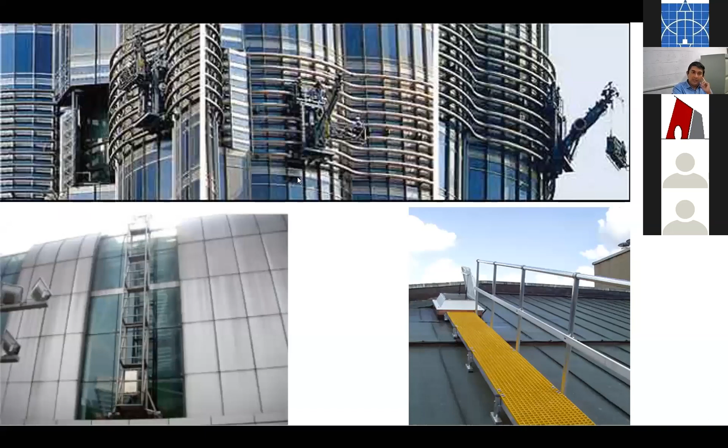The final note will be on two buildings in the Shanghai Pudong area. One is the Jin Mao building, which was done quite earlier, and it was there in 2004 when I came in, which was only shorter than the Taipei 101. Of course, done in the same manner, as an outrigger structure. Now, this building is a complete showman structure. You can see you have a 152-meter atrium. When you look down or look up, you feel dizzy. And of course, they do have glass bridges or glass floors that span the atrium.

And whenever I see glass flooring, I feel like doing a little loading test on it, because people need to see whether these glass surfaces are safe to tread on. And looking at this building, you can see this outrigger structure, just like a bamboo shoot. That itself is a cleaning service operator's nightmare, because you have so many jagged edges and so on, as if the architects and the designers had something against the building maintenance guys.

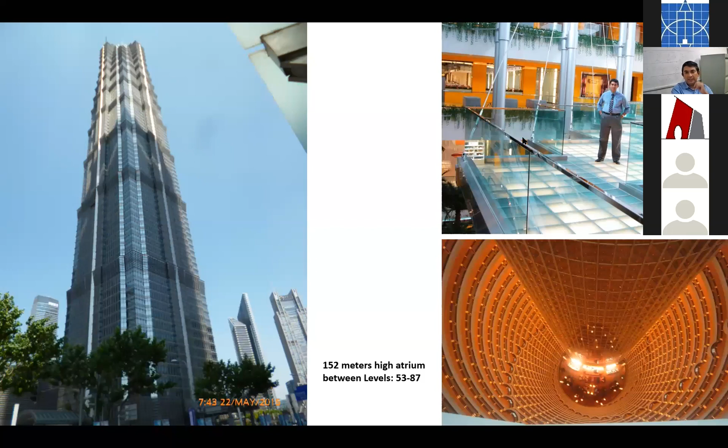But when I get onto the Shanghai Tower and observe the top of this Jin Mao building, you can see how the architects and the engineers have articulated the BMUs or the building maintenance units perfectly well with the building form, that you cannot detach them, the BMU and the railing tracks, from the form of the building itself.

And these located in the right place and the right position, the equipment is geared to ensure that every nook and cranny of the building exterior could be cleaned up, and the glazing could be inspected, that they sit perfectly well into the structure itself. Now, this is the structure during the evening, and these are the two BMUs parked side by side on the top, right? This is Shanghai in the evening.

And looking at this, another structure is the building with a hole in it, as we had this 9/11 incident. People were laughing that they thought that if somebody wants to fly an airplane into the building, if the pilot wants to change his mind at the last moment, he would have this hole to fly through. But actually, it's not the case.

But the architects had a fancy idea of articulating this building in a way that it makes the cleaning and the maintenance of the facade into a living nightmare. But at the same time, you will see how they had the good sense of incorporating a building maintenance unit system to clean every nook and cranny of this facade, which undulates on all four sides possible, right?

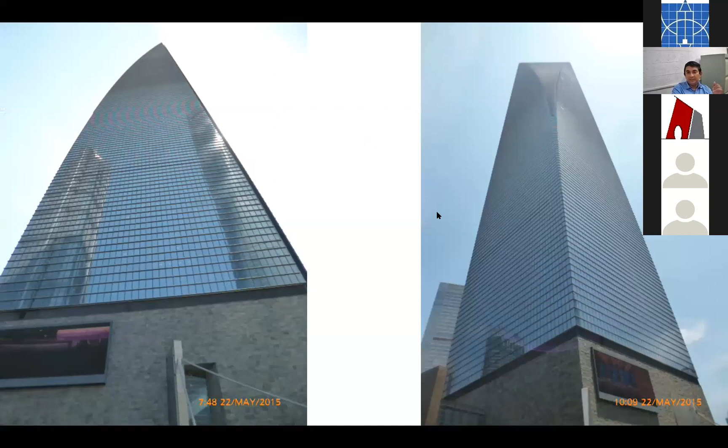So you can see how it undulates on the vertical, horizontal planes, and how it kind of leaves no straight line at all. I'm looking at this building from ground level. You can see how awkward the facade undulates. And of course, the two neighbors are not very different either. You can see the twisting Tower of Shanghai on one side, and the jagged Jinmao Tower on the other side. And for this guy to have this crazy top is not much of a surprise, right? So this is looking at the two neighbors and this building.

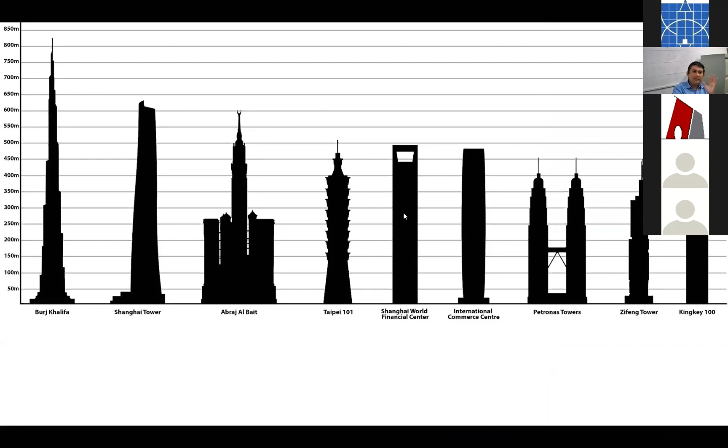And we talked about these buildings. This is within this period, 2015, if I remember. Out of the first 5 buildings, these 2 buildings were among the tallest 5 buildings, right? This guy was taller than 600 meters, while this, the SWFC tower, which I'm going to focus upon, was almost 500 meters tall. And looking up at this building, you could see how there are 2 little compartments or little galleries. One is a gallery on top, and of course later on you will see there's another gallery below.

And then here the building is all about showmanship as well. You have this gallery up there, just about 500 meters above the city of Shanghai. You can traverse up there onto this gallery, and then what you do is you take photographs from the floor slab, again glazing. So you have structural glazing that you can stand on, so that you can take photographs of the city below. Of course, that's the topmost part of the building. You can take images from the side, and then you can see they are literally standing on glazing.

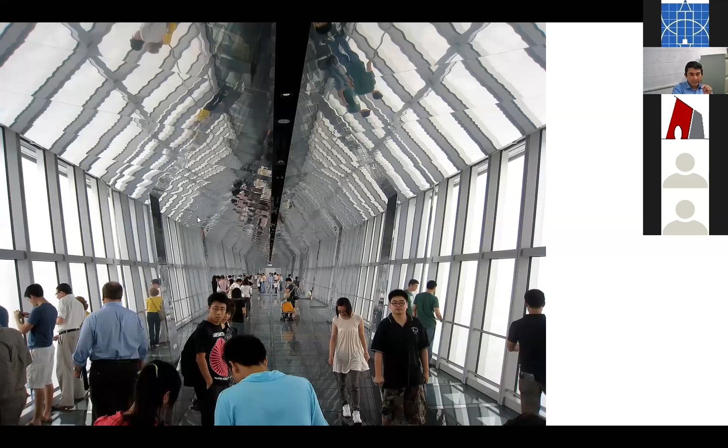And whenever I see structural glazing, you are allowed to stand on it and take photographs, just to show that you are standing on thin air. If the glass collapses and if I fall, I would still be tumbling down this building right down. Now you look right below this glass panel, and what you see there is this square object. Philip Cox is written on it, and it is a BMU.

You can see how, if you go down there and look at how this BMU is placed, I don't know whether you can see my cursor. This is the BMU I'm looking at from above. Now a close look will show the trade name Philip Cox, and you get into this gallery and have a closer look. You see how this is parked very unassumingly by the corner, and of course it is movable.

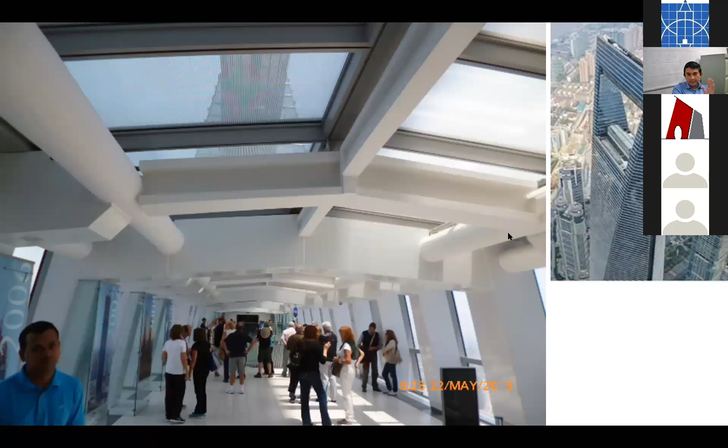Now this is the gallery below, and you see the telescopic boom, which could extend and also swivel outwards and clean or repair every nook and cranny of this undulating facade. If not, it is these guys who really suffer because of our designs, and they may not be very happy with the architects nor the engineers who would design structures such as this. But that's why you need to have this kind of meticulous thinking.

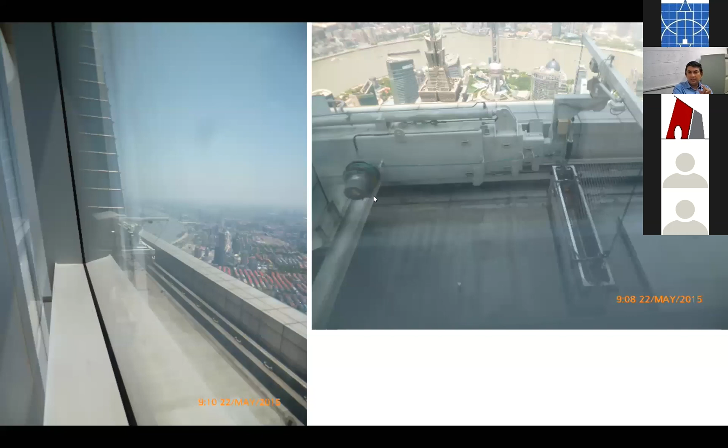Now it's a movable BMU, telescopic boom with a swivel attachment and a very spacious service gondola that would move up and down. And oh boy. And then what we have here is how you see it parked outside this lower gallery. So you can see this BMU, and this is the lower gallery, this is the upper gallery.

And having a second look at this building, that's the upper glass gallery from which you can stand and watch below, and this is the second lower gallery adjacent to which you have this BMU, right?

So I think there's a little limitation on the time. I think we are approaching 8 o'clock.

And you can see you can access the facades of this part of the building from this BMU. There are 3 more on the upper level, which could ensure that even the uppermost levels could be reached. The facade could be maintained from the service gondolas of these BMU units. So

We talked about fire safety, we talked about the structural integrity of glazing or the facades, the curtain walls, as well as the other types of walls and fenestrations. We talked about the testing parameters, and last but not least, we talk about the aesthetics. Of course, I'm not going to dwell upon aesthetics.

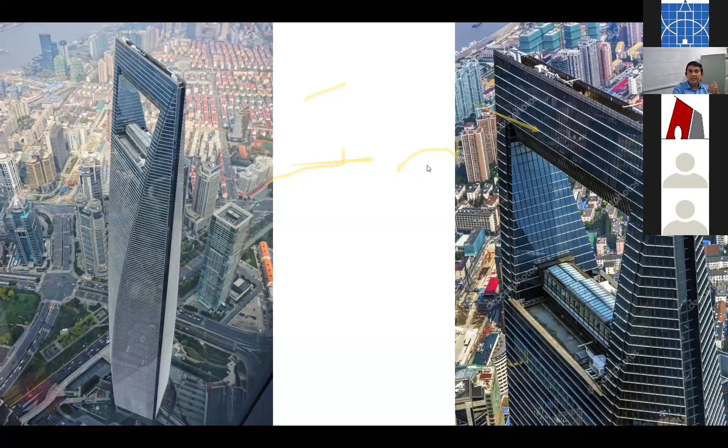Now, my final comment is that as much as the performance is important, this composite expression of a city, its identity, its people, the message it has to convey is also as important as our functional needs of keeping structural integrity, ensuring fire safety, as well as ensuring water tightness and air tightness of the building, etc.

So, coming to the last slide, my comment is the building facade, of course, is a building skin, but while the skin has to be aesthetically palatable, let not the consideration of designing the skin be skin deep. So the consideration should not be skin deep while we deal with the aesthetics.